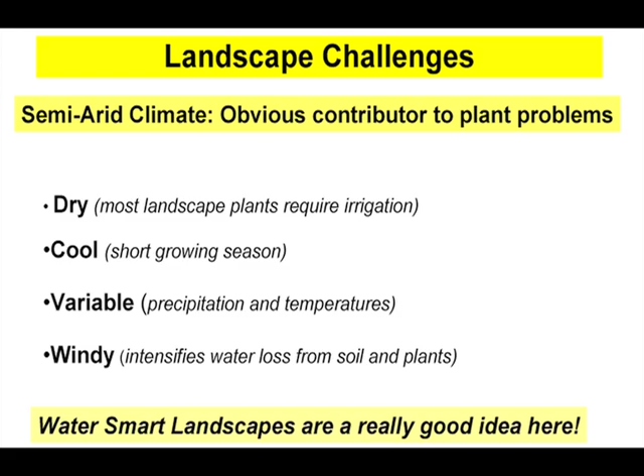And wind—it's a windy climate. It intensifies water loss from soils and plants. So water-smart landscapes are a really good idea here.

I think the climate is the most obvious contributor to soil or plant problems we have here. But perhaps what people don't necessarily appreciate is the most common inciting factor to plant disorders in Colorado is the condition of the soil. And yet that's the one resource we tend to know the least about.

Landscapers and gardeners can tell you at depth about every plant in their garden. They can probably even give you the name in Latin. They can tell you the diseases and the insects. But usually, not always, but usually they can tell you little if anything about what they're standing on.

But here's the thing, soil is the fundamental component of any landscape. Whether you're talking a xeriscape, your lawn, your veggie garden, your orchard, it is the fundamental component. Soil conditions contribute to over 80% of any and all plant problems you're ever going to see on your landscapes.

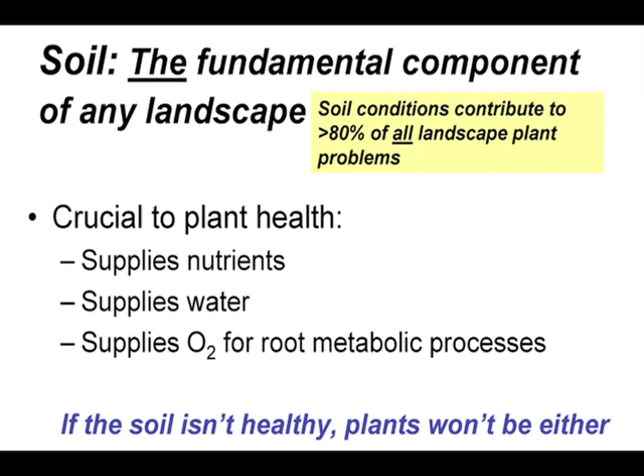And that's because it's so crucial to plant health. The soil is what provides the plants with nutrients, with water. Those two are fundamental for plant growth, but it also supplies oxygen because roots have metabolic processes that require oxygen.

Here's the thing, if your soil isn't healthy, your plants aren't going to be either. There's an old saying out there, if you feed and nurture the soil, the soil will then feed and nurture the plant. And I'm going to argue, how can you nurture the soil if you don't know anything about it? If you know the basic properties of your particular soil, you can use that knowledge, that information, to improve the soil health. Thereby, what you're doing is better managing, better nurturing your landscape and your plants.

And I argue that one of the best ways you can get an idea of your basic soil properties is, if you've never done it before, get a basic soil test. Know what your basic soil properties are.

Now, you have this FAQ sheet that talks about soil testing. I've got these if you want to do soil testing. What you get here is a soil container. There's a sticker in there to put your name and information on, but inside is all the information you need on how to sample, as well as the submission form. You fill all that out, send it in, get a sample, and get it analyzed. I think this is the best way to at least get a baseline knowledge of your particular soil properties.

What are those basic soil properties? I think these are the things you need to know if you want to manage your landscape well. It's important to know the texture of your soil. That's simply how much sand, silt, and clay are in your soil.

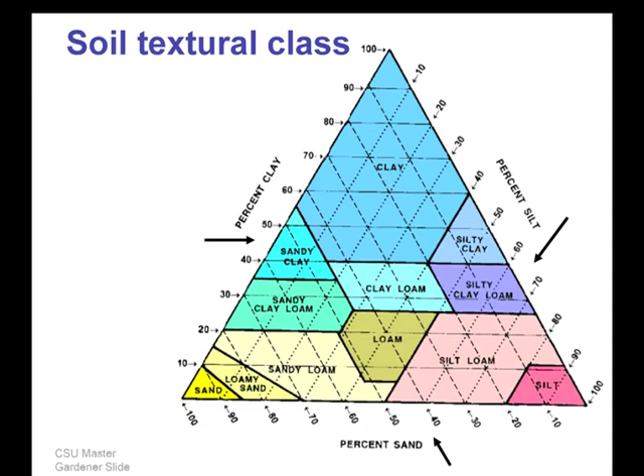Here's the thing: clay content strongly influences soil properties. You only need 20% clay for a soil to behave as a clayey soil. Take a look at the names—clay is showing up heavily in these names. Clay heavily dominates. Well, what does that mean? What are the properties of a clayey soil?

It's important to know your soil texture because soils dominated by clay are very different in properties than soils dominated by sand. And the intermediate soils have intermediate properties.

For example, soils that have a lot of clay in them have really high water and nutrient holding capacities. They can hold a lot of water, they can hold a lot of nutrients, and much of this is available for the plants, so that's a good deal for the plants.

The problem is clayey soils—if you have a lot of clay in your soil, you have a lot of small pores. Clay has small pores. Well, what that means is infiltration of water into your soil is very slow. Drainage of water through the soil is very slow.

So you end up with aeration problems. You end up with it being slow to warm up in the spring. They're prone to crusting, they're prone to compaction, and they're prone to salinity buildup because water does not move well through that soil.

Now, how many of you have clay soils? That's the norm. Any sandy soils? Am I the only one?

Yeah, you've got. I moved from Fort Collins to Windsor about 12 years ago, and I'm now in a sandy soil. It's a whole different world. I've had to relearn how to manage my landscape.

Sandy soils have low water and nutrient holding capacities. They just can't hold that much water or nutrients, so that stresses the plant. But they have huge pores, big pores, so they drain fast. That means they're not prone to aeration problems.

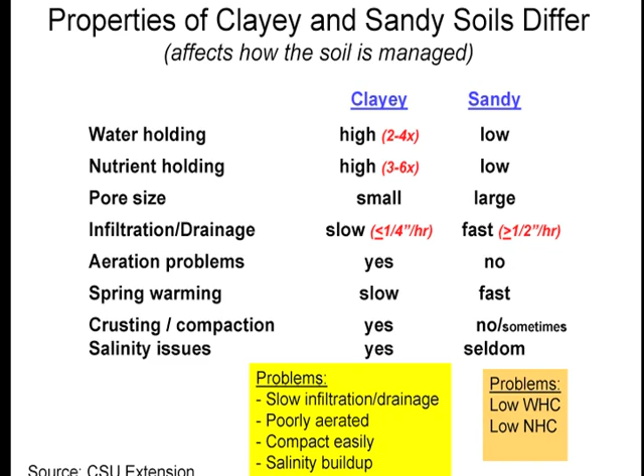They warm up fast in the spring. They don't tend to crust—crusting is a clay thing. Sometimes they're prone to compaction, but not nearly to the extent of a clay soil. And you don't usually see salinity buildup in a sandy soil because it drains so well.

So you do a soil test, it comes back, and the word clay shows up in your soil texture. That means what you need to be thinking about are these issues: my soil is going to have slow infiltration, slow drainage. That's going to impact how I irrigate.

Poorly aerated—that's a problem for your plants. You've got to be careful. You can compact the soil easily, and you need to watch out you don't build up the salt content of your soil.

For me, now that I'm in a sandy soil landscape, low water and nutrient holding capacity is my problem. These other problems are not any longer my major problems. My problem is how do I get this soil to hold enough water and nutrients to support my plants?

So if you have a clayey soil with all those small pores, you have lots of area to hold water, but you don't have enough big pores to aerate your soil. The opposite holds for sandy soils: plenty of aeration potential, but not enough small pores to hold the water.

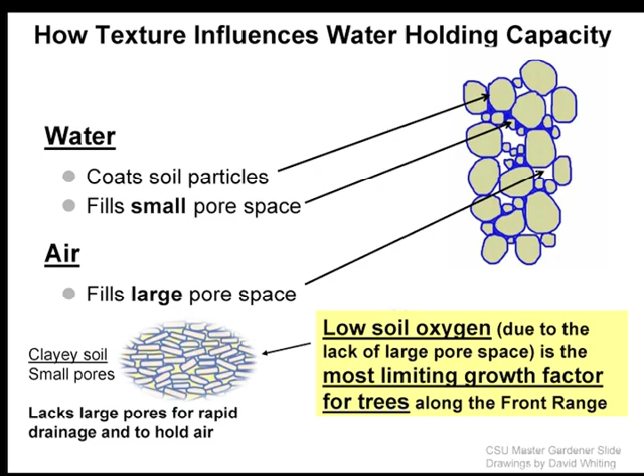You've also got to think about in your design and management: how fast can you add water into the soil? How fast will water go into your soil before it saturates the surface and runs off? How often should you add water to the soil? How deep will the water go? In this soil, if you irrigate too long, the water is going to be down below your root zone. So the general rule of thumb is on clay soils, water infrequently—you need to give that soil a chance to dry out and recharge the oxygen—and water thoroughly, get that water down deeply.

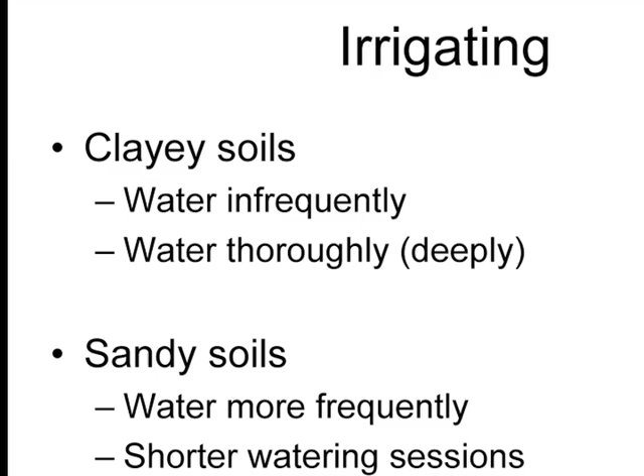Sandy soils, you're going to have to water more frequently. If you water every 5 days in the hot summer on a sandy soil, your plants are not going to have any water after about day 2. And water with shorter sessions—if you water 30 minutes, most of that water is wasted because it's gone down too far and the roots are up here while your water's down there.

So why is proper irrigation so important? Well, obviously you waste your water if it's running off. You've spent your money, wasted the water, and your plants are still thirsty.

Clay soils—I volunteered with the city of Fort Collins a couple summers ago and did irrigation audits. One of the things we found is people with these clay soils tend to water shallow, for a short period of time, and they like to water every day, very frequently. Well, that's just the opposite of what you need to be doing. They tend to do that because clay soils can't absorb water very fast, so runoff starts pretty quickly. Instead of learning that you can adapt to that, they just add water until it runs off, not much has gone in, and then they add it again tomorrow.

Here's the thing: what you do when you do that to a clay soil is you get a chronically wet surface soil. That acts as a barrier or a lid on oxygen from the air getting down into the soil and recharging it. So with time, the microbes down here are doing their thing, using up oxygen, and the soil becomes very low in oxygen. Well, the microbes shut down, and the roots won't go there—roots don't go into soil that's low in oxygen.

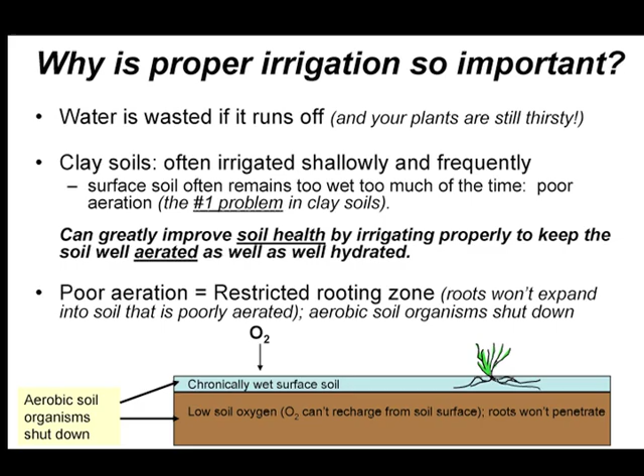Whether or not there's water in that soil, if it's low in oxygen, roots won't go there. So you're condemning this poor plant to be shallowly rooted in a chronically wet soil. It's not happy—it's not going to get nice deep rooting, like your lawn grass should have, until you can get oxygen down into that soil. This is unhealthy, not a happy soil. The plants and the microbes aren't too thrilled either.

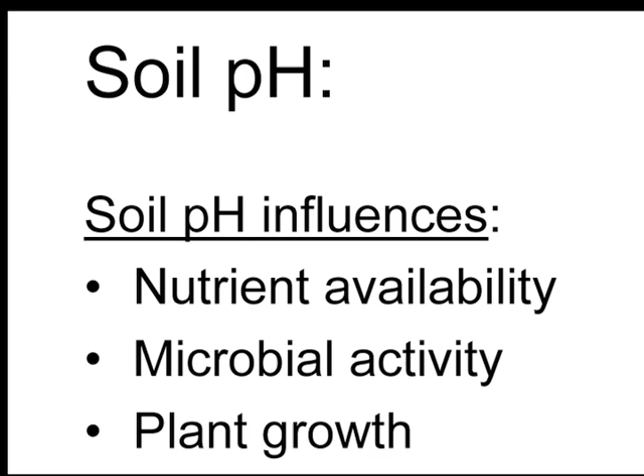All right, let's move off of texture. Why do you need to know the pH and lime content of your soil? Well, pH is important—it influences nutrient availability, it influences the type of plants you can grow, and it influences microbial activity. Different microorganisms live in different pH soils; the ratio of bacteria, fungi, and actinomycetes changes depending on the pH of your soil.

All right, this is your typical pH scale. If your soil is a pH of 7, it's neutral—equal amounts of acid and alkalinity. If the number's low, it's an acidic soil; if the number's high, it's an alkaline soil. Here is what's generally accepted as the range in pH that's acceptable—not ideal, but acceptable for most plants. Most plants will manage a pH of 6 to 7.5.

There's the exceptions, the acid lovers. Blueberries, rhododendrons, and azaleas want an acid soil. They're not going to be very happy over here, since they actually prefer very acid soils.

Some of our Colorado soils have a near neutral pH from 6.8 to 7.4. This is your mountain soils and old garden or lawn soils in Old Town, where 50, 60, 100 years of irrigating and adding amendments has made their pH a little bit lower. Here's the thing though, most front range soils are alkaline, pH 7 to 8.3, and many of our soils are outside of the sweet zone.

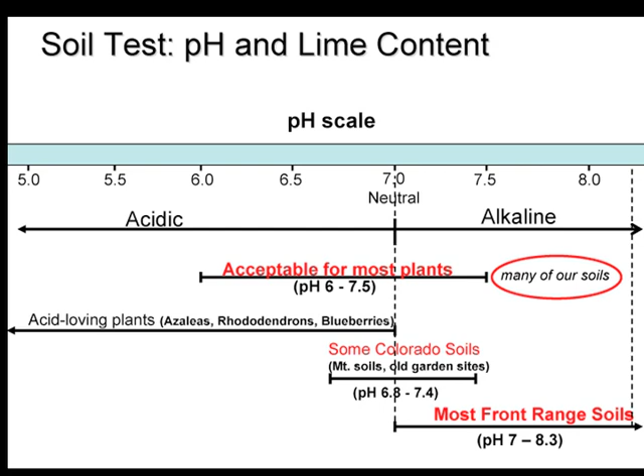They're highly alkaline, outside of this generally accepted range of pH that plants are happiest in. So we get this question a lot. I'm involved with the master gardeners and we hear this one all the time: how do I lower my pH? Sometimes it's just, I'm at 7.8 pH and want to get it down closer to neutral. Many times people are asking, I want to grow a blueberry, a rhododendron, an azalea. How do I take my 7.9 pH and get it down to 5?

You don't. So here's the rule of thumb: if your pH is alkaline but low, in the low 7s, you can lower the pH by adding an acidifier such as sulfur, only if there's no free lime in that soil. That's why you need to know your lime content.

But here's the deal, our soils are well buffered. What that means is the chemistry of soils is such that it resists a change in pH. It's hard to change the pH even if you don't have any lime. It takes a lot of work and the results are usually temporary.

So it seems like one of the things we're trying to stress is maybe change your mindset. We don't live in Ohio, we don't have naturally acid soils for the most part up and down the Front Range. So instead of trying to grow an azalea, take a look at alkaline-tolerant plants. There's a bunch of gorgeous ones, and I'm sure that will be talked about later today.

If you just have to grow that blueberry, you will not successfully change the pH of your soil enough to get it down to an acid level that blueberry is happy with. So instead, think about a big pot, making an artificial acid soil, and growing your blueberry in the pot.

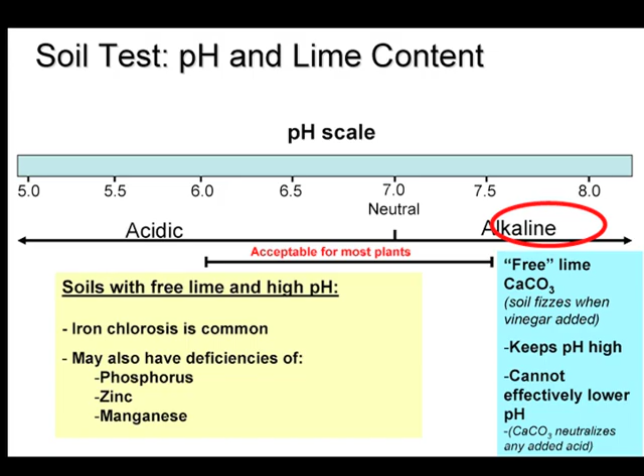Okay, here's the thing though. If you have a soil that's strongly alkaline and it contains free lime, all you need to do is drip a little vinegar on your soil. If it fizzes, you've got free lime. That's a predominant characteristic of our soils, and it tends to keep the pH high. If you have free lime, you cannot lower the pH of your soil effectively by adding acidifiers. That lime will neutralize any and all acidifier you can ever add to that soil.

So, you get your soil tested, it comes back and says you've got a pH of 7.9 and very high lime. Well, you just use this as a red flag for your soil, for your landscape. Soils with high pH and high free lime, here are some things that happen: iron chlorosis is common, and you may also see deficiencies of phosphorus, zinc, and manganese. It's not that there's not enough of these nutrients in the soil, our soils are loaded with iron and these nutrients.

The deal with many of these nutrients, and these are the main ones, is that as the pH of the soil gets higher, the plant-available form of that nutrient precipitates out. You've got lots of iron, but it's in a form at a high pH that the plant can't take up. The plant can't use the forms of these nutrients, much of it, at high pHs.

So, you've got your bad news: you've got 7.8 pH and a very high lime. You know that your soil is going to be susceptible to iron chlorosis. Well, you need to start thinking about, if you have the opportunity to put a plant in, what plants have a high susceptibility to iron chlorosis?

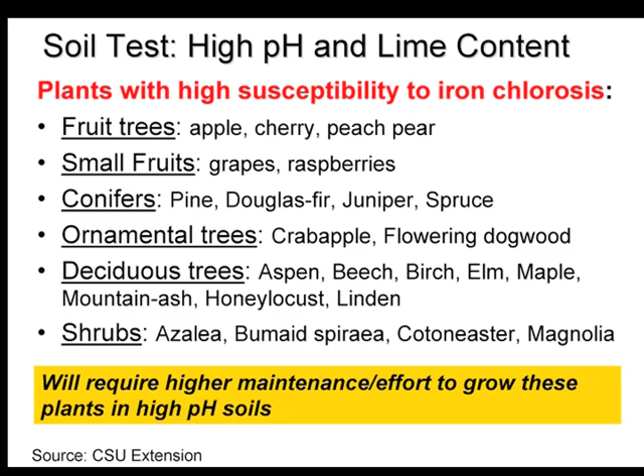Well, take a look at this: the fruit trees that are listed, the small fruits, the conifers, ornamental trees, deciduous trees, shrubs—everything on here is something that's very popular as a landscape plant. People want to grow these. Now, it doesn't mean you can't grow them, it means that growing them on this type of soil is going to take a lot more maintenance. You're probably not going to have the prize plant. It's not going to be the biggest, lushest, happiest, healthiest.

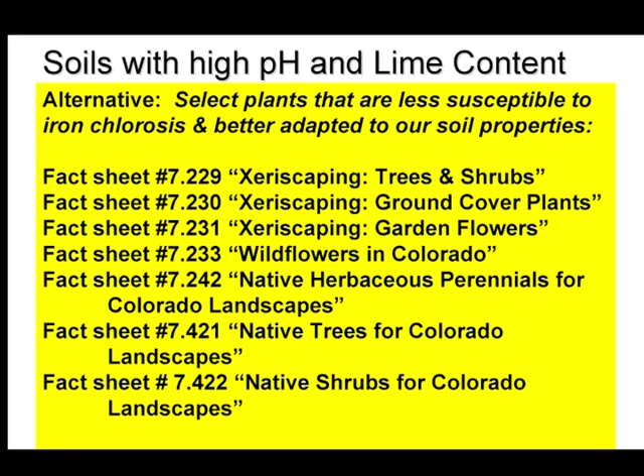It's going to be more susceptible to disease and it'll probably die young relative to the plant being in a place that it's happy. As an alternative, think about selecting plants that aren't so susceptible to iron chlorosis and are better adapted to our soils. Think about plants that are happy here, instead of trying to force plants to live on soil and in a climate where they're simply not well suited. There are tons of fact sheets on xeriscaping, wildflowers, and native plants—just a wealth of good information. All right, we're going to move on and talk about organic matter.

Organic matter in the soil has a small living component and a large non-living component. A healthy soil is a living, breathing ecosystem, chock full of all kinds of organisms. It's loaded with organisms ranging from microscopic fungi, bacteria, and actinomycetes, to bigger critters like worms, ants, spiders, and insects that you can see, to even bigger creatures living in the soil like pocket gophers, prairie dogs, mice, and ground squirrels.

Many of the soil organisms living in the soil have a direct influence on plant health. I'm going to focus on some positive influences—there are all kinds, but three really important ones. One is the decomposition of organic litter. All kinds of microorganisms and organisms are involved with that process. A plant dies, the roots are dead, the tops fall to the ground, a mouse dies—living creatures die and become litter that is then decomposed in the soil. All kinds of organisms are involved with this.

The benefit of breakdown of organic litter—while practically speaking we're not 200 feet deep in carcasses—is that when you break down that litter, the decomposition process releases nutrients available for plants. Plants can't take up nutrients in a dead leaf; they can only take up those nutrients after that dead leaf is decomposed or begins to decompose. The decomposition process also ultimately forms soil humus, and that's a good guy in your soil.

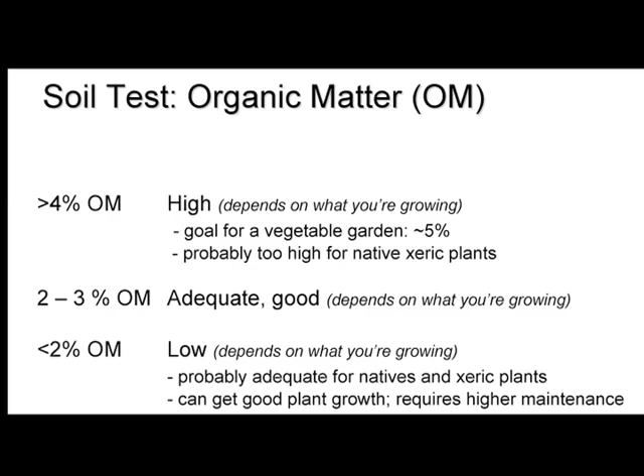If you're trying to grow a native or xeric system of plants in a high organic matter situation, you may end up with weeds and undesirables pushing out your desirables. 2 to 3% is considered adequate, good, but it depends on what you're growing. Less than 2% is generally considered low organic matter. It's native here. Our soils, the shortgrass steppe, are less than 1%. That's pretty common, but it depends on what you're growing. The natives and xerics are probably just fine with this.

Now, if you have low organic matter and you've decided you're not going to add more for whatever reason, it doesn't mean you can't grow plants. It just means it's going to be higher maintenance. The goal is to match the organic matter needs of the plants with the organic matter content of your soil, and to stay in a reasonable range—to not try to grow a plant that wants to be in a bog, for example, or a plant that loves high organic matter in a 1% organic matter soil. You need to know what your plant prefers, how far you can change your soil organic matter, and then match them up.

Why add organic matter? It improves aeration and drainage in clay soils. It increases water and nutrient holding capacity in sandy soils. You'll get some plant available nutrients, stabilize your pH, improve structure and tilth—the workability of your soil—and it feeds the microbes. Now there are some differences in...

What am I talking about with organic amendments? Organic amendments are not the same thing as organic fertilizers. Organic amendments are things like compost, biosolids, sphagnum peat, worm castings. When somebody says add organic matter to your soil, they're usually talking about this.

Organic fertilizers are organic materials too, they just have a high concentration of nutrients. So this is stuff like the meals—plant meals, alfalfa, soybean, cottonseed, corn gluten meals, animal meals, bone, blood, feather, guanos, fish meal, seaweed, rock powders. These are mainly organic fertilizers, though the rock powders are not. They're materials with a concentration of nutrient.

There's a major difference between these two materials. Organic amendments are not regulated by law, and this is really important to know. No regs, no standards for bag products, some voluntary standards for bulk. They don't have to give you any analysis. They don't have to tell you what's in the bag other than this is steer manure, it's composted, it's pulverized, no weed seed, it doesn't smell. That is not nearly enough information to know what you're putting on the soil.

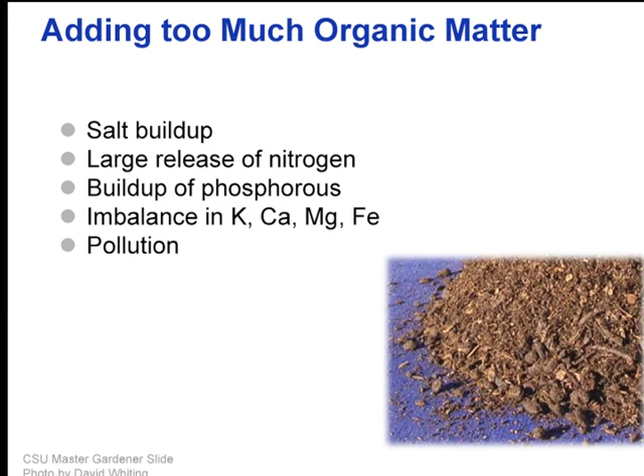You can get a big buildup of phosphorus. That's becoming a problem in the country. My understanding is, and I don't know how accurate this is, but there are states seriously considering not allowing phosphorus fertilizers to be applied to landscapes.

When you overload organic matter, you can also end up with an imbalance of the nutrients in the soil. Soil nutrients are healthiest at specific ratios of potassium to calcium to magnesium. If you dump a whole bunch of potassium into the soil, for example, and many animal-based products are loaded with potassium because of what the animals eat, you mess with the plant's ability to take up calcium and magnesium.

Even if there's a whole bunch of calcium and magnesium in the soil, and our soils are loaded with available calcium and magnesium, if you overload with potassium, you mess up the plant's ability to take up something else, in this case calcium and magnesium. When you've got a whole bunch of nutrient that the plant doesn't need and will never need, that the microbes don't need, you're setting yourself up for being a source of pollution.

Okay, we're going to move to salinity. Let's talk about salinity. I mentioned it a little bit. So what happens if you've got too much salt in your soil? What does that do? Why does that matter?

Well, the biggie is it reduces water uptake by plants. They actually dehydrate. Even if there's a lot of water in the soil, water starts moving from the plant out into the soil. It's an osmotic potential thing. When there's too much salt in the soil, the plant cannot pull up water, even if there's plenty of water to be had. It will burn the roots, restrict root growth, burn the margins of the leaves, inhibit flowering, mess with seed germination, and reduce your fruit and veggie yields.

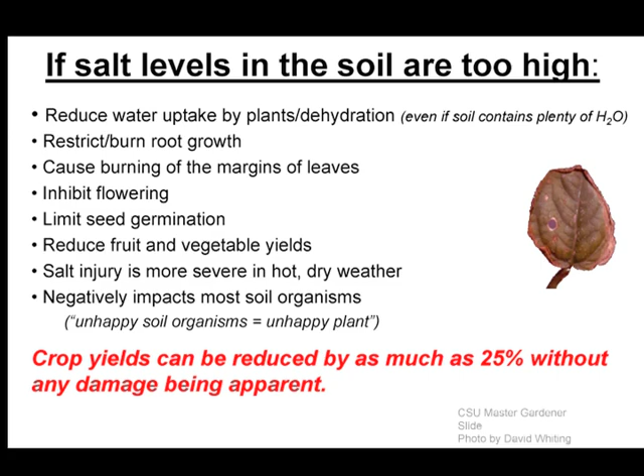Here's the thing too, people don't think about. When your soil's too salty, that's a negative impact on most soil organisms. Just imagine a worm trying to live in a soil that's just had a boatload of something salty dumped onto it. You know, it's true. If your organisms aren't happy, your plants aren't going to be happy.

And here's an interesting thing I hadn't realized until recently. With your fruits or your veggies, you can have as much as a 25% reduction in yield and not see a single indicator that your soil's too salty. Doesn't show up at all.

You don't have any white crust on the soil, there's no burning of the leaves, but a 25% reduction. Salt is a serious issue for plants.

So how much is too much? Well, if you have your soil analyzed, the lab talks about soil salinity in terms of electrical conductivity, or EC. There are two kinds of units, millimhos per centimeter or decisiemens per meter. The units don't matter, they're interchangeable. What you're looking for is the number 2.

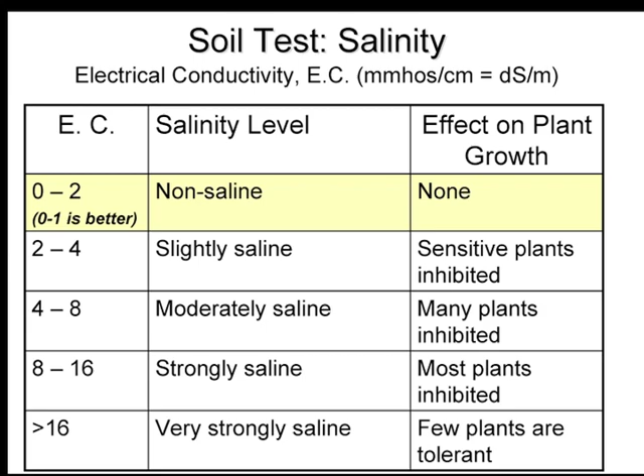If the EC of your soil is less than 2, that soil is defined as non-saline and you shouldn't have a negative impact on the growth of plants. If that number is higher than 2, the higher it is, the more saline your soil is, and the more plants are killed or severely restricted by that salt load. So this is a good number to know.

Here's the thing, most of our soils are not naturally saline, but by how we manage them, by what we add, we're building up the salinity of many soils. Because soil amendments such as manures and biosolids and compost made from them are very high in salt.

So are many of these topsoils that you can buy. They're not regulated by law either. You can buy a stellar product, it's great topsoil, or you can buy basement diggings with a bunch of raw manure mixed in and sold as topsoil.

If you don't know the analysis of this soil, what we're finding at the soil test lab is over and over again, people bought a topsoil, or a potting mix, or a soil mix, built a raised bed, and everything died. They tried to grow a veggie garden, and everything died.

The director of the soil test lab talked about serving as an expert witness at a big lawsuit in Denver a number of years ago. This guy built a palace of a house, spent $100,000 on his landscape, and the landscaper neglected to have any analysis done on the yards and yards of topsoil he bought, and everything died. He was getting sued.

Well, the salinity of the topsoil he bought was something like 12, hugely high, and we're seeing numbers like that over and over again. These products are not regulated by law. Some of them are excellent, some of them are not. So be careful what you add to the soil if you don't know its analysis. Use them sparingly, and monitor the salt levels.

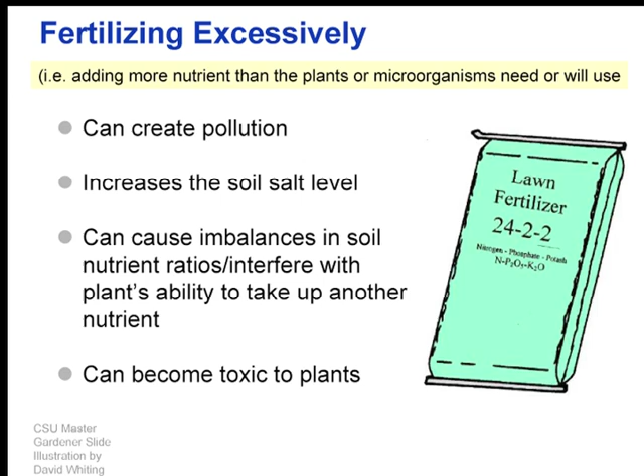You'll salt up your soil, mess with the balances of nutrients, and with the micronutrients you can add so much that you're actually at a level that's toxic to plants. We're finding that with some of the products people are adding, a topsoil or a potting mix, sometimes they're extremely high in micronutrients, so high that it's toxic to the plant.

Okay, evaluation of your soil. Any particular questions you have on how to soil sample, how often to sample, or how many samples are fairly well covered here, and I'll be around to answer particular questions.

Again, with the sample kits, these are nice. The lab likes you using these because people tend to give you a gallon of soil for the analysis, or a 5-gallon bucket of soil, and that's a huge labor input for the lab to process all of that to representatively subsample. This is all you need for a routine soil test. So that's one of the reasons they like you to use these.

The others are Ziploc bags, puncture, open, they're harder to store in the lab, it's just a practical thing. All the instructions you need, everything you need is in here. These are free. You just pay for the soil analysis when you send in the sample, or they'll even bill you.

Just so you know, right now the routine soil test is $28. If you have like a potting soil, something you know is higher in organic matter, a potting mix or a manure or a compost, that's more expensive because you have to do more analyses, and then there's all kinds of specialty tests you can do if you want.

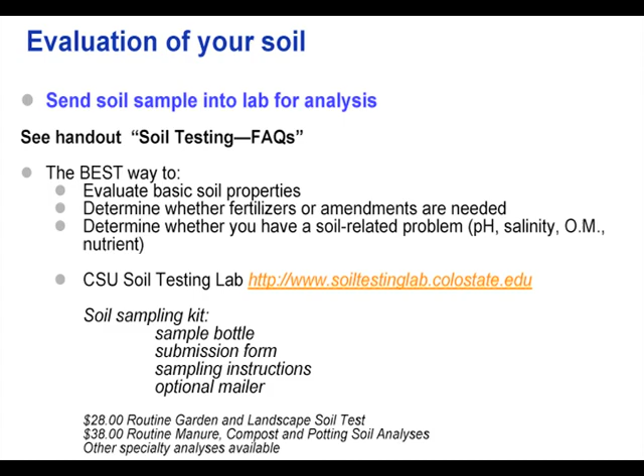Okay, I'm a 30-year soil scientist. My bias is numbers on soil, that's what I do, so obviously I think this is very important. But if you know your basic numbers, you really can use this as a tool. Knowledge of the basic properties of your soil to a large degree determines how you ought to be managing that landscape. It's an important tool in your toolkit, but it's not the magic bullet.

I want to make a final point here. Soil testing isn't going to provide all the answers to your landscape problems. If your problem is you're a terrible irrigator, you overwater consistently, you underwater, or you're inconsistent, soil tests won't tell you that. It's not going to tell you if the main problem on your landscape is disease or insect damage or weeds or too much shade.

You start out with this lovely bluegrass lawn with your new house, and in 15 years your trees are enormous, shading that bluegrass, and the bluegrass is looking kind of ratty. Bluegrass doesn't like shade. So you need to know, the soil test isn't going to tell you that that's the main problem with that bluegrass.

It's not going to tell you if really the variety you have of, say, your crabapple isn't a very good variety—there's other varieties that are better. Soil test isn't going to say whether or not your main problem is you're neglectful of your landscape. And it's not going to tell you whether or not your soil is compacted.

Compaction is a number one issue with our soils on landscapes because it gets so compact when we build the buildings, and we've got so many clay soils. With compaction, you get poor aeration and drainage, and that may be the number one problem on your landscape, not a specific soil property.

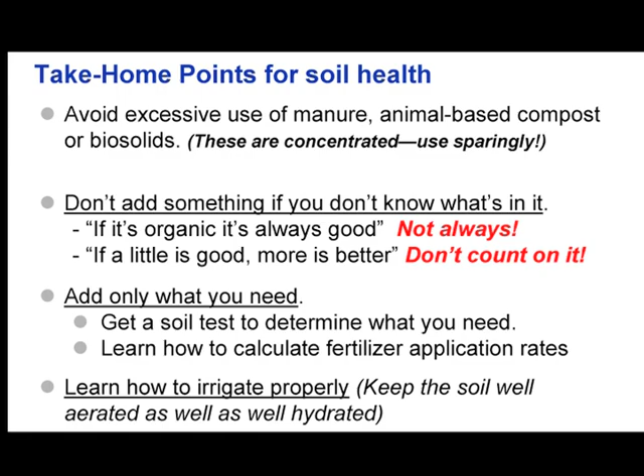Bottom line too, last but not least, is learn how to irrigate properly for your particular soil, for your particular landscape. If we focus on not only hydrating the soil but keeping it well aerated, you're going to have a lot happier, healthier soil. Now I think, yeah, that's it. And if we have a few minutes I'll answer questions. Otherwise, let me get into landscape design, water-wise landscape.

This is one of my passions. It is really a fun topic to work with because there are no black and whites. It's all grays because there are so many factors that play into it. When we talk about plants and their water use and the soils and all the things that play into it, it is a very, very complex topic, and it's one that I love to play with and teach about.

If you want the long version of this presentation, the 6-hour version, you can go to my website, which is www.cmg.colostate.edu. Click on Garden Notes, and Garden Notes 411, 412, 413 is the 30-page handout that I'm just pulling a few highlights from for today's class.

I try to look at that longer class and say, if I only have 45 minutes, what do I really want to say? First off, design, landscape design is not the same discipline as gardening. People who are excellent gardeners may know nothing about design, and people who are excellent in design may know nothing about gardening. There are those who have expertise in both areas, but they are separate disciplines. So being a good gardener does not mean that you know principles of design.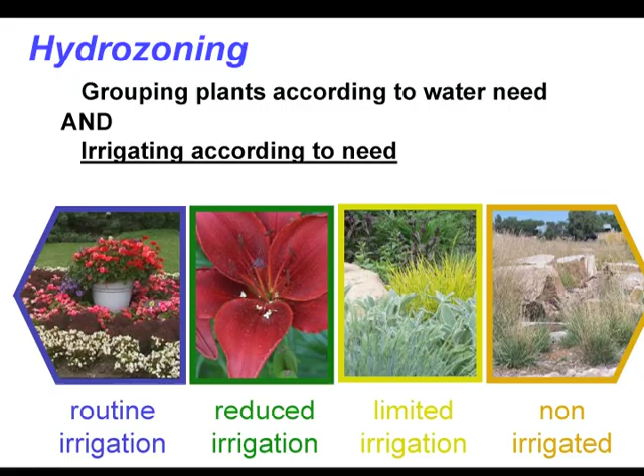And where does the typical Colorado landscape come out? Most landscapes, the entire design is routine irrigation. We have a habit of thinking high input Kentucky bluegrass covers everything that doesn't have a flower or shrub here and there. Hydrozoning is walking the talk, recognizing that we have a lot of options.

And it goes back to the design, back to what do I need to achieve in this landscape. So I may have lawn areas that have routine irrigation—that would be the football field, the soccer field, the baseball field that has a lot of traffic on it. It would be unlikely that a home landscape needs routine irrigation on the lawn because you don't have the wear and tear. Reduced irrigation for a lawn is going to irrigate at about 80% ET. It will look just as nice as 100% ET, but it won't take as much wear and tear.

The only wear and tear that my lawn gets is me mowing it, unless I have a party. So it doesn't get a lot of wear and tear.

Minimal irrigation lawns. Some examples of companies here in Fort Collins that are phenomenal at understanding this are Hewlett-Packard on Harmony Road, and Anheuser-Busch Brewery. In their high-use areas, up by the office buildings, at what Anheuser-Busch calls the Visitor Center where you go see the Clydesdales, you're going to have as perfect a bluegrass lawn as you could possibly grow in Fort Collins, because it is a high-use area.

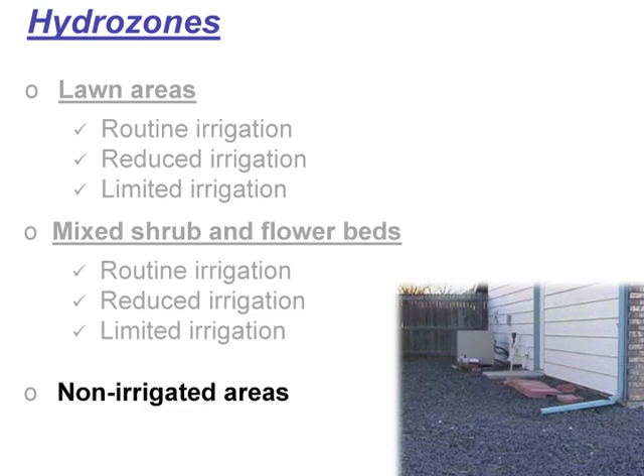Non-irrigated areas - if there is no landscape function there, why are we watering it? I think a great example is the sides of a home. If there's no landscape use for that space, other than it being space between you and the neighbor's house, why are we irrigating it? It's walking the talk.

A few quick slides to look at how this may apply. I'm going to do a home scenario because it levels the playing field. The blue would indicate routine irrigation, the green reduced irrigation, then limited and non. Maybe I have a reduced irrigated lawn, because a home lawn rarely would justify high input.

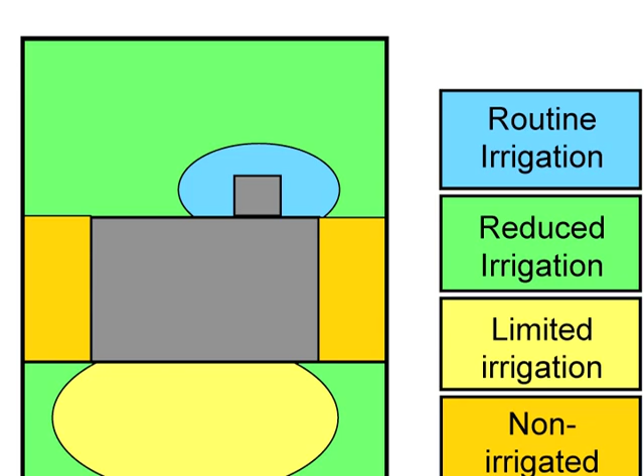Maybe I have some flowers here that require routine irrigation. Maybe I have a section here on limited irrigation, plant materials that do fine only being watered during dry spells. So that would be an example of hydrozoning.

Now, I don't mean that the bed is necessarily that exact shape - that's simply how, in the design process, we identify that hydrozone. Maybe we go to a larger spot with limited irrigation. Maybe we have a section with reduced irrigation, and some sections with routine irrigation.

Again, what we're saying is different sections of the yard have different amounts of water that they will receive. Maybe the property is non-irrigated, with some limited irrigation in the high-use areas.

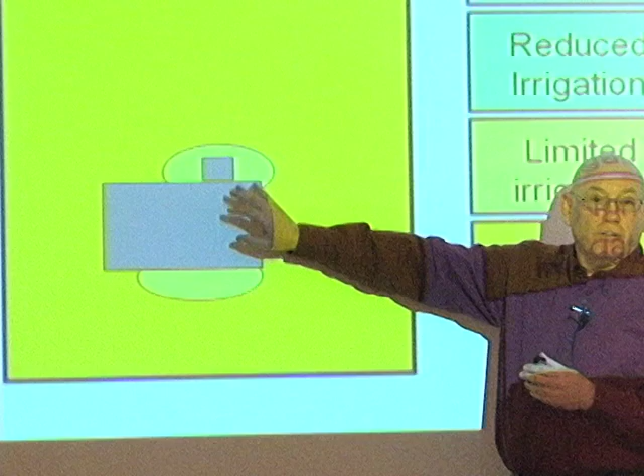The point we're making: if we want to walk the talk of being water-wise, the entire landscape is not watered every Wednesday and Saturday just because it's our turn. It is watered based on the plant materials that are there and the use of the property.

So here would be some other examples. Maybe I have a patio, a lawn, vegetable garden, flower beds. But maybe that flower bed doesn't adequately define zones. Maybe I have flower beds with routine irrigation in one section, reduced irrigation in another, and limited irrigation in a third.

And why can't I mix them? Because if I mix them, everything gets watered like the first, and I don't save water. And those plants that are truly xeric, that don't like heavy water, probably won't do well in that heavy water situation. So here's another scenario.

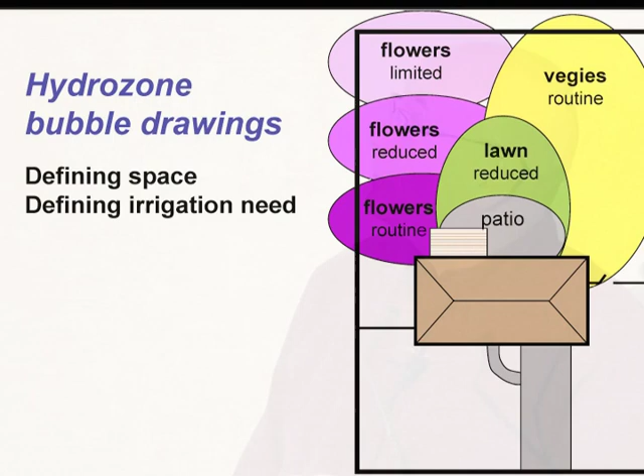The flower beds may be more clearly defined as various zones. Why don't I mix them? I'm on drip - why don't I put a dripper with 1 gallon over here, a half gallon over here, and 2 gallons over there?

Because that's not truly reflecting the plant's needs. The half-gallon dripper is going to wet a spot this big, the 1-gallon dripper wets a spot this big, and the 2-gallon dripper wets a spot this big. Does that mean the xeric plant has a small root system and the water-loving plant has a big root system?

That's not accurate. So I have different zones that I can water to different amounts. That is hydrozoning. That is walking the talk.

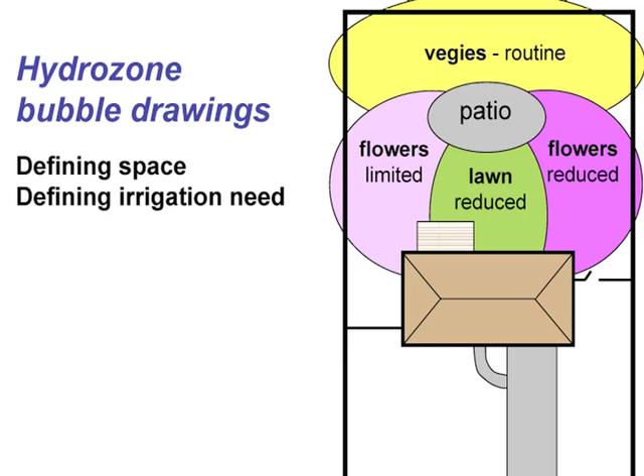Okay, different scenarios. Quickly talking about creating practical turf areas. Again, water-wise landscaping is not anti-turf. It's about matching the turf to the use of the property. Like I mentioned with Hewlett-Packard, high input turf in the people area, low input turf on the rest of the property.

Quick comparison of the water use of Kentucky bluegrass and other popular turf options. If I look at Kentucky bluegrass, we're going to call it ET. ET is an actual measurement of the amount of water that bluegrass needs. In our climate, it needs 36 inches of rain and irrigation per season.

And where's the typical home lawn being watered at? About 60. So that would be the high input turf that will take all the best wear and tear. I could go to more drought-tolerant cultivars and reduce my ET to about 75%. I could cut to about 80% ET, giving 28 inches versus 36, or in reality, 28 inches versus the average of 60. And I couldn't tell the difference between this lawn and the 60-inch one, other than my lawn won't take as much wear and tear.

Do you have a lot of wear and tear? I could go to tall fescue, which is often touted as drought tolerant because it has a deeper root system, but actual water use is very similar to bluegrass. So it's a misnomer that it's a water saver.

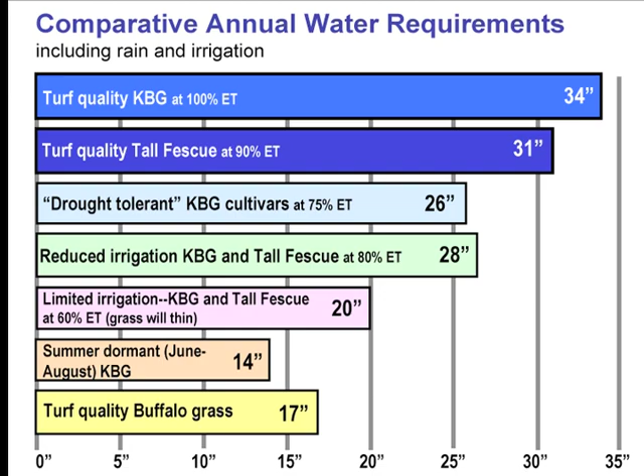What's the use of the property? How about buffalo grass? If you're going to have it green in the summer, it's got to have 17 inches. These are the three most commonly used turf types in Colorado. There's a lot of options beyond the high input Kentucky bluegrass that we typically give 34 inches to.

Again, water-wise landscaping is not anti-turf. This is a corporate property—this is where the bosses sit to think, and it is amazing what they come up with. They consider this one of the most valuable pieces of property on their entire campus, because the concepts that saved millions of dollars came around that table. Turf creates a people space.

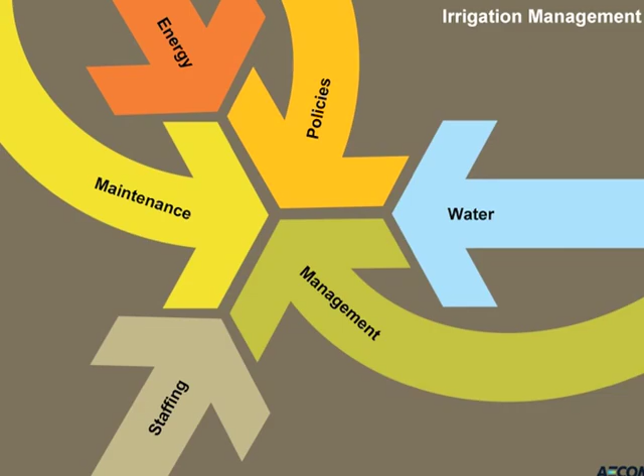When we talk about irrigation systems and managing water, there's a lot of things involved in that process, a lot of inputs that come into managing a landscape. We have management and maintenance policies that sometimes in public entities, parks departments and so forth, are policy-driven agendas. There's energy involved, there's staffing for maintenance and management, and then there's water that all comes together to make these systems work.

So the goals and challenges often are to meet the needs of a landscape or the needs of the community or user group, whatever it may be, whether it's a park or a corporate facility. David showed some really nice properties and talked about what the user wanted out of those. So this is what it comes down to: are we developing or maintaining parks, trails, open space, recreational areas, or is it our front yard?

We often, as public agencies, want to demonstrate the wise use of resources. As businesses and public agencies, we want to save water, use staff efficiently, save energy, and be overall efficient in what we do. And then we all have available budgets, whether we're a city or a homeowner, that kind of drive what we do.

So the benefits of smart water management are many. We heard a lot of them in terms of landscape health of plants, health of soils, and also reducing overall costs. In order to do these things and work within available budgets and resources, we need to have an idea how much water we're using and reduce the overall cost due to water usage.

So when we talk about water-wise management of irrigation systems, it really comes down to the efficient delivery of water to plant material in correct amounts and at the right time, to promote the optimal health of the plant materials.

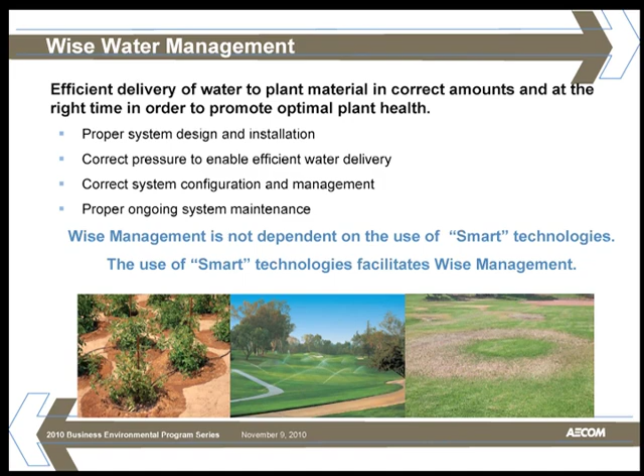So proper configuration of the system, proper management of the control systems and of the overall system, and then proper maintenance, because once a system falls into disrepair, you have problems with coverage.

When we talk about smart, we're going to talk about some smart technologies and what those are. Wise management isn't dependent on the use of smart technologies; they're really just a tool. The smart technologies facilitate wise management. So we need to be careful of some sales pitches that say put in this controller, an ET controller or whatever, and it's going to solve your problems. Well, it won't, if you have an inefficient system and configure it poorly.

Tony talked about Xeriscape, and I won't dwell on these things, but I hear people often talk about this, and it really drives me crazy - they say Xeriscape, I'm going to do a Xeriscape and just put rock in my yard. Well, okay, that's a Xeriscape, can't argue with that. But I think David talked very well about what Xeriscape is and how it works into the landscape.

So there are many parts to an irrigation system, and they're all kind of important, and all these things need to work together. And they're not only just parts, but also the process it takes to bring all those parts together correctly to meet the needs of the landscape.

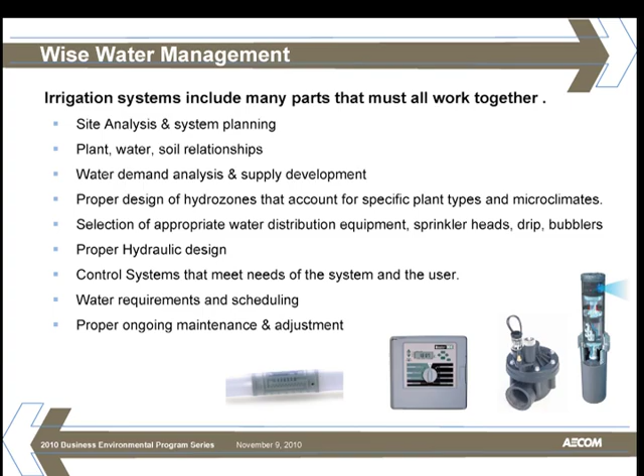So the number one thing is to look at the site, analyze the site, whether it's an existing site or a new design, and what are the needs of that site, how is it going to be used, and plan out the system so it can address the specific needs of the plants.

We need to look at the plant, water and soil relationships. As Dr. Reeder mentioned, the soil test is probably one of the most important things, not just for the plant, not just for the soil itself, but when it comes to irrigation design, understanding what those soil types are is very critical. So another thing we do is often look at what the water demand is going to be.

We've got to get water somehow, and so with larger projects that we work on, often a critical part of that up front is to figure out how much water this landscape is going to require. So we have some pretty good methods of calculating that based on the plant material that's going to be used, so we can properly develop a water supply.

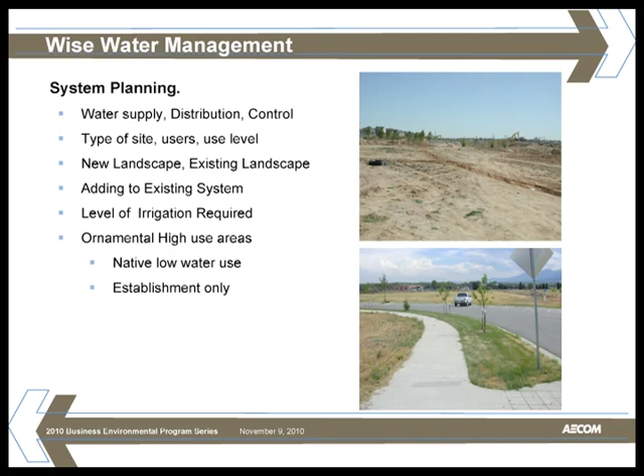And that might mean just getting the right tap size, getting the right pipe size, and understanding what the limitations of that water supply are.

Often, in the example of many commercial properties or homes, we have a determined supply available. So then we have to design a system that will operate within the limitations of that available water flow rate and pressure. And on bigger projects, sometimes we have the luxury of saying, okay, we need this much water, let's design a pumping station or a pond or a well or whatever that may be to meet those needs.

Another important thing, when you talk about salinity, is if you're using water sources other than the city water supply, what's the salinity level in that water? A big thing nowadays is to use treated effluent water, treated sewage water. A lot of cities are starting to use this, what they call reclaimed water, for irrigation of park spaces and so forth, and some cities are even making it available to residents. So it's important to realize that water can often have the potential of high salinity levels that we need to understand.

So proper design of hydrozones - I think David really addressed that very well. Hydrozones take a look at the specific plant types, and not only the plant type, but is it in a sunny area or a shady area? Is it on a slope? Is it in an area that's susceptible to a lot of wind or reflected heat or whatever that might be, so that we can tailor the system to meet the specific needs of the plants.

So then comes the selection of the proper equipment, which means things like sprinkler heads, spray heads, rotor heads - rotator heads are kind of the new thing now. And these all have their specific place where they are appropriate.

And also that includes drip irrigation and bubblers or whatever it might be to meet the needs of the plants. And then proper design of the system means that we have proper hydraulics so that we get proper pressure to the system, and control systems that meet the needs of the user and of the landscape.

We get involved in a lot of large projects where the user comes in and says, we've got to be highly efficient, we want an ET-based system or a central control system. And we design that into the system so that they have all this capability, but often they don't have anybody that's going to manage that. They don't have the ability to really make use of that system.

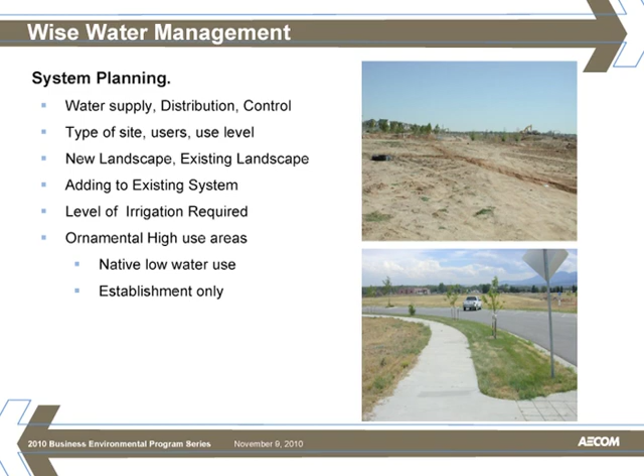How much irrigation is required is driven by the use areas and the plants. We have different use areas - is it a high use area, turf for example, that needs more water than a low use area, and then establishment only.

A big thing now is to use native plant materials, native grasses. A lot of big park sites, instead of doing bluegrass everywhere, will design with bluegrass in the sports field and the areas surrounding it. Beyond those real use areas, they want to use more native grasses that often don't need much irrigation, and over the long term maybe don't need any. But it's often important to get those established - if they don't get properly established, weeds come in and choke them out, and the owners aren't happy with them.

It might take several years for those to finally grow in, and that process can often be sped up if we have some establishment irrigation to help get them going. So that's something to figure in as well.

Some sites get very complex. They might have interior spaces, water features kind of mingled with them, and so there's a lot of planning involved in more complex type projects.

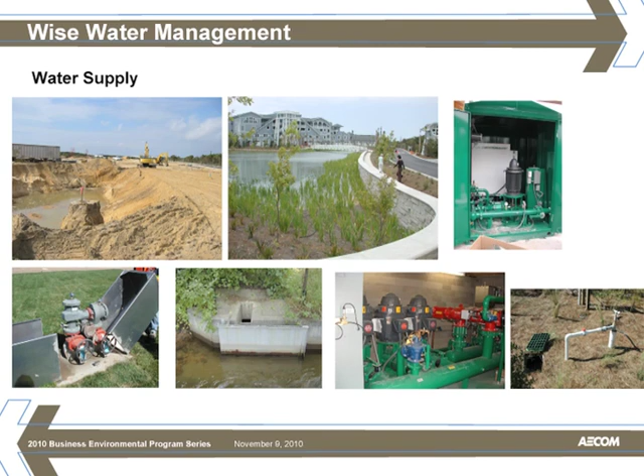Water supply - we get involved in developing all types of water supplies for the landscape, from well systems that feed into ponds that we then pump out of, raw water delivery through a ditch, or even just a municipal type water supply connection.

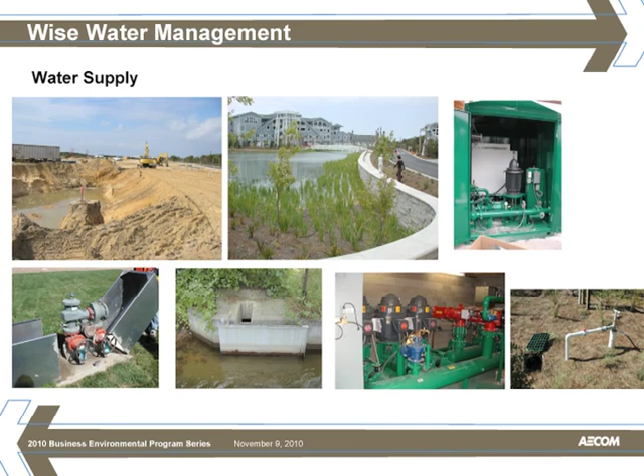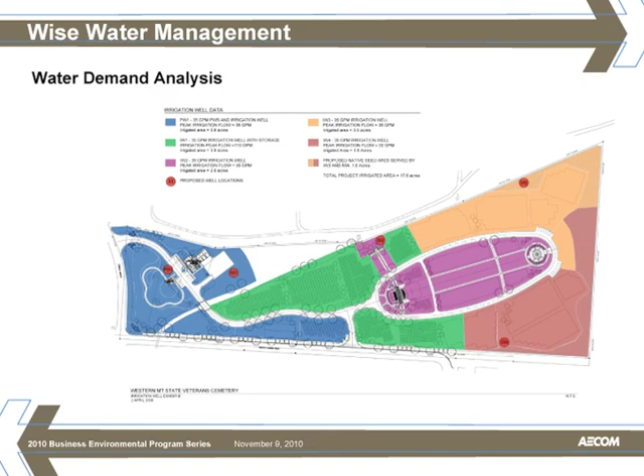The water demand analysis will often look at the site and look at the different use areas. This is kind of simplistic, it doesn't break it down as much as we often do. This is just an analysis that was done for a veterans cemetery we worked on, looking at the water demand needs in different parts of the site, because of water laws to do with how much water they could use out of each well. So we can calculate what these amounts of water would be.

When we talk about hydrozones and system zoning, we need to look at what kind of plants they are, where they're located, what's the spacing and density, what special maintenance issues there are, what kind of exposure it has. This is really the key to having a system that can operate efficiently. It doesn't guarantee it's going to operate efficiently, but if you design a system that addresses the different hydrozones, and it's configured and managed properly, it can then operate very efficiently.

But I want to stress, if it's not, then you really didn't accomplish anything. So it's really very critical that when a lot of work goes into designing a system and making it all work, that it's then managed correctly.

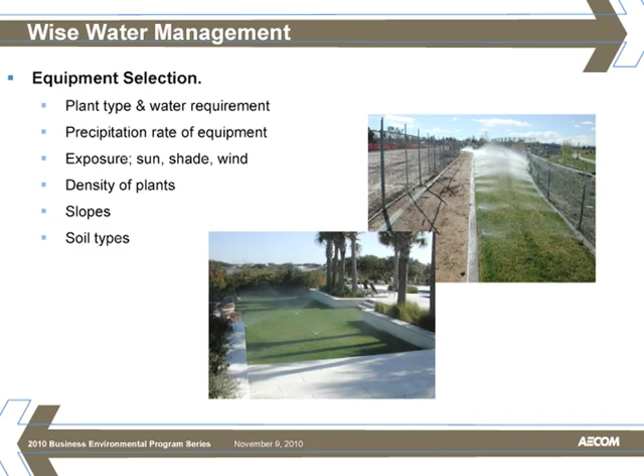So the selection of equipment - when we talk about equipment selection and meeting the needs of the plants and the soils, often we talk about precip rates. Precipitation rate means how fast water is being applied to the landscape. If it's applied too quickly, say on a high clay soil with a slope on it, it's often going to run off, so that needs to be applied at a slower rate so it can infiltrate.

If it's a sandy area, it might need more frequent irrigation and it might not have as much tendency to run off. Density of plant material can make a difference on how much water is required, as can exposures. So really just the appropriate equipment for the type of plant and the area is what we want to get from this.

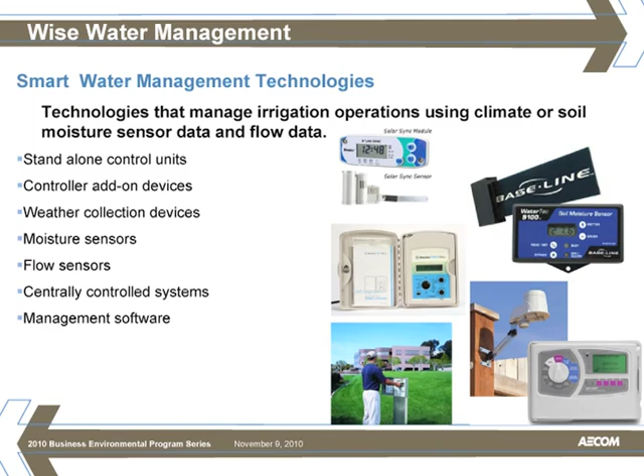Let's talk a little bit about smart technologies. On the tables back here, there's several of these type of smart controllers on display, and they vary - there's different methodologies of smart controllers, the main one probably being ET-based type products. There's also ones that measure soil moisture levels. These are available as a standalone controller that you replace the whole controller, or as add-on devices you can add to an existing controller to give it some additional smarts. I think these are to meet the varying budgets of different users.

There's different weather collection devices. There's ET gauges, one back here that just measures the various hydrologic data needed to develop the evapotranspiration rate number. David talked about ET as a measurement of how much water is required. That stands for evapotranspiration, and there's a formula to calculate that number based on various factors such as temperature, relative humidity, solar radiation. So by measuring the weather data, we can then calculate that. Some of these devices do it in different ways. You can use a full-blown weather station or some simpler devices that are quite effective but not as costly.

So we talk about moisture sensing. Really what we're trying to do is maintain a moisture level in the soil. Using the ET-based devices, you're estimating how much water you're going to need to put on to replace what's lost, so that you can maintain a certain moisture level. When you use the soil moisture sensors, you're actually looking at what the actual level of moisture is.

There's been varied success with different devices. I think there's now systems and sensors available that are very reliable and work very well. But it's critical that they're implemented correctly, installed correctly, in the correct locations and so forth in order for them to work. And then also that the control systems are programmed appropriately to take advantage of those.

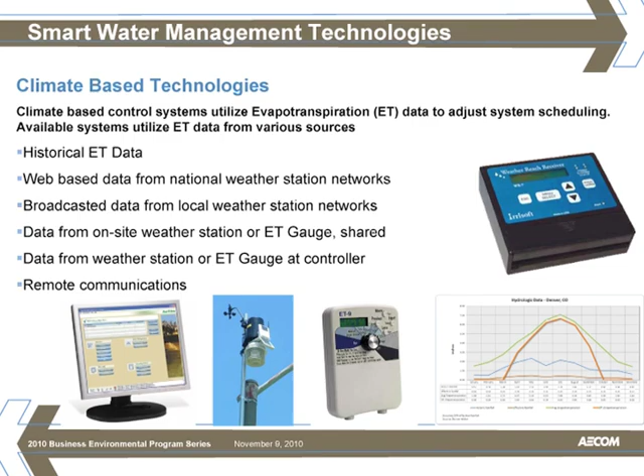This is a graph showing the months of the year, and the evapotranspiration. The water requirements go up in the summer, and then they dip back down. You can see that the actual water requirements vary almost daily. This is just looking at historical data, but if you look at actual data, we get a line that goes up and down all the way. So the average of that might be somewhat lower than this. The difference between just using historical data versus using real-time data can even further reduce the amount of water that could be saved.

Then the soil moisture technologies - there's different types, the water on demand and the suspended cycle. This TDT technology is some of the technology that's very successful.

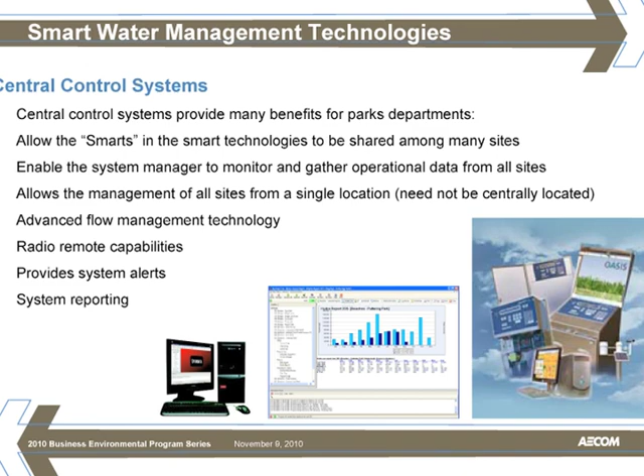System reporting is important because you can get reports on daily, monthly, annual water use. All kinds of reports are available with these systems to help the person managing the system understand how they're doing and how much water they're using or saving.

So there's a myriad of communications options nowadays. Most all of these systems can utilize any combination of these type of communication options.

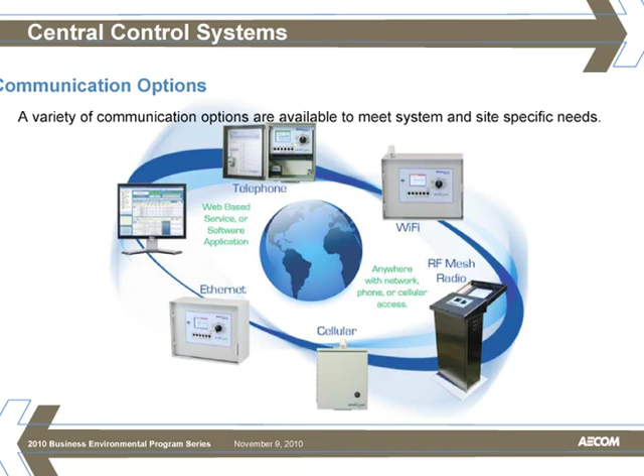Again, just managing large sites - I think we kind of talked about this one. When you talk about these systems, it's very critical that they're planned out, and that they're not just thrown in and implemented haphazardly. There's a lot of planning that needs to go into these to make sure you have a system that really the user can utilize, and a system that functionally has the features that a specific user might need.

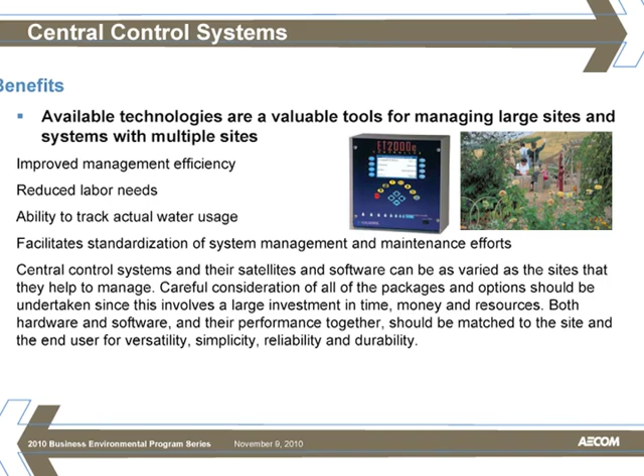It's important to look at what control systems are available, identify the goals and priorities of whoever's going to be managing or running the system, and identify the technologies that are available. Often these things need to be implemented in phases, so looking at a phasing strategy that allows them to use available budget and apply it in a logical fashion. Often we want to start implementing these things in areas where you can realize the biggest savings first, because it is a large investment.

I'm not going to get too much into all this planning, but we often go through a system inventory. This is where we had all the parks data in a GIS database, and we could look at this and say, okay, the existing park system uses all these types of controllers, and here's where they're at. It's a great tool for figuring out how to start implementing the system and how many controllers there are to replace, and if you have communications in a given area, it really helps in developing a communication network to ultimately serve all these controllers if they were converted to a central control system.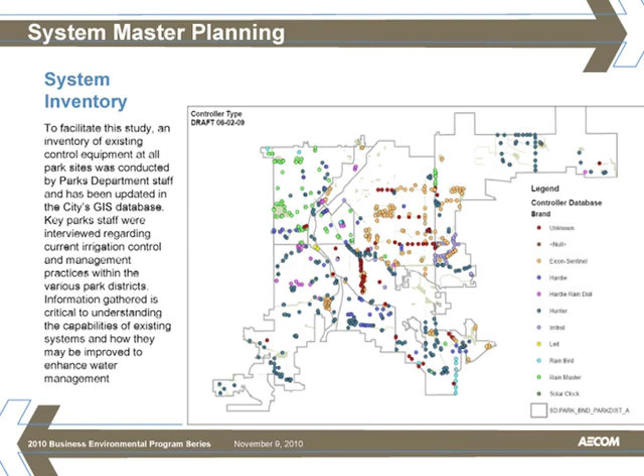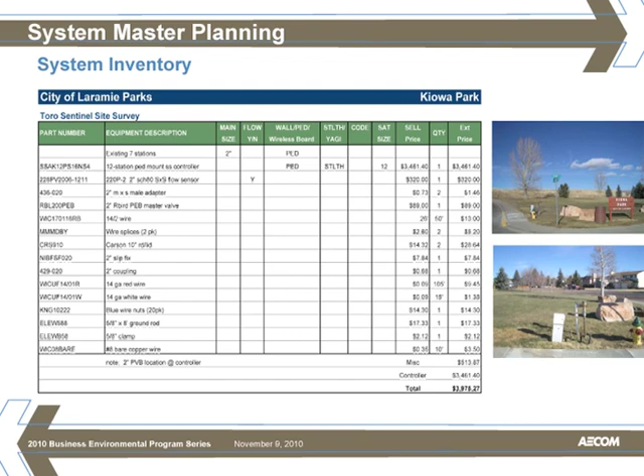So we look at what the needs of each park site are. The city of Laramie is implementing a system now, and we worked with them - we took a look at every park site, determined what equipment was going to be required, and so we could come up with a solid estimate for them on what the cost would be for their implementation. We did this for all of the park sites.

So a few things that I talked about before: who's going to manage the system? How many sites are going to be served? Do you need multiple control units? What are the water sources you're dealing with? What kind of pressures are there? Are you going to have pumps and so forth in the system? What are the communication methods that work within that area, and what's the availability of different communication methods? What kind of power do you have? Do you need to utilize - we have remote sites where we've utilized solar power.

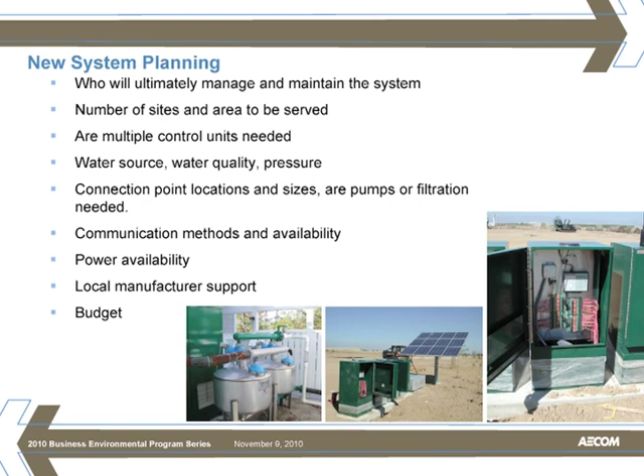And then, just system retrofit planning. So as you have a system that you've got to convert from one to another, how are you going to most effectively do that? If you have a business and you want to implement some of these technologies, and you have many sites to deal with, you want to look at what portions of the system might be reusable, what do you need to replace, and can it be done in phases?

We've come up with a process where we look at all these factors and come up with selection criteria to help large users of these central systems determine what systems they really need, what features they need, and then how they might most effectively be implemented.

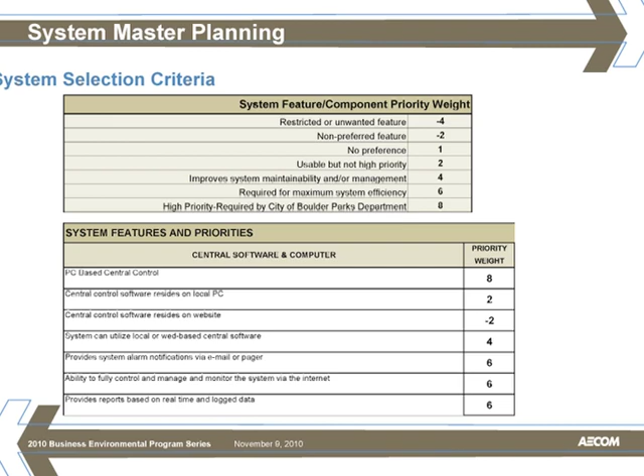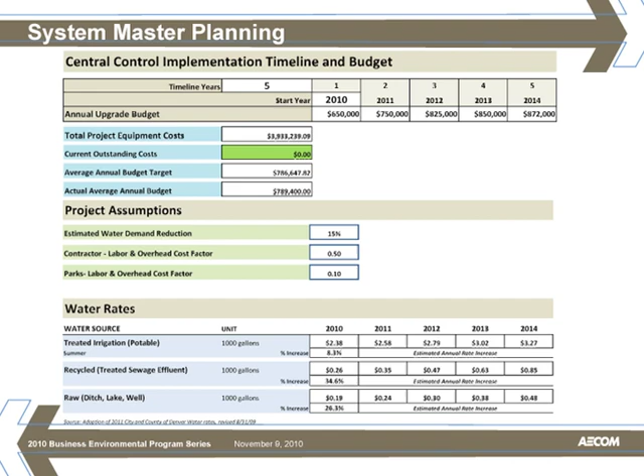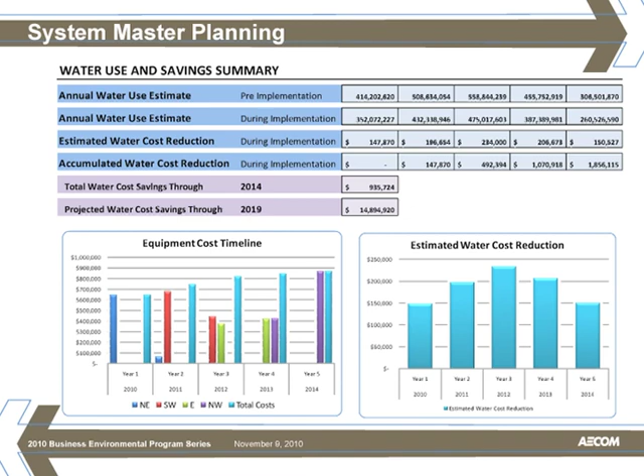So we can come up with a budget, looking over a given timeline at how much money they're going to need to spend each year to implement the system. What are the total equipment costs? How much can we reduce the irrigation demand? What are the water costs currently, and projected into the future for each year? That allows us to look at the potential implementation costs, as well as how much we can reduce irrigation over that timeline, and come up with a cost-benefit analysis.

So in this case, if you started in 2010 and went through 2014, as you start out you have this accumulated water cost savings every year. In this scenario, over that timeline, there's a potential of saving about $935,000 on water usage versus the cost of implementation.

In year one, it's costing us money to put the system in. Year two, it's still costing us money. As we start getting more sites online and managing them better, we start to see in years four and five that we're actually having a positive cash flow, because we're saving water even though we're still spending money to implement the system. So it's a valuable tool for the user to see what the benefit is going to be.

The big thing to look at is that's just five years. Now take this savings and extend it over 20 years, and it becomes really substantial. So even though the cost to implement some of these systems seems huge, the potential savings, when you start looking at the escalating water rates and so forth, is substantial.

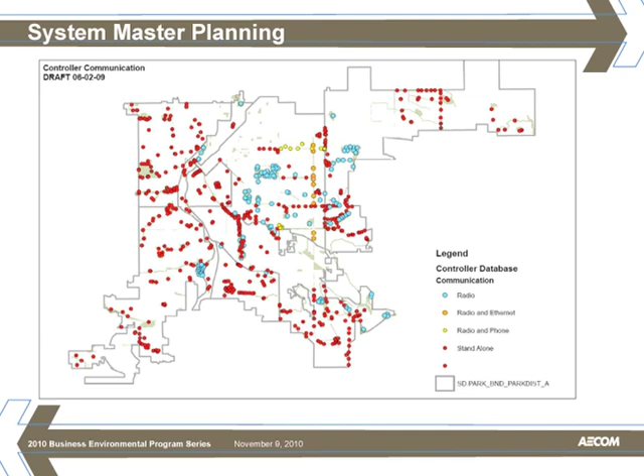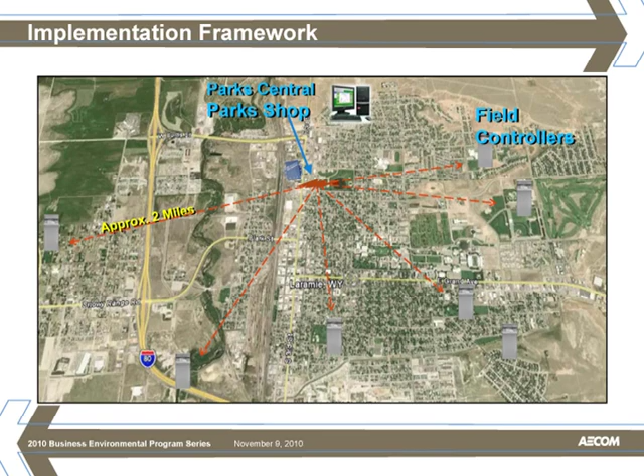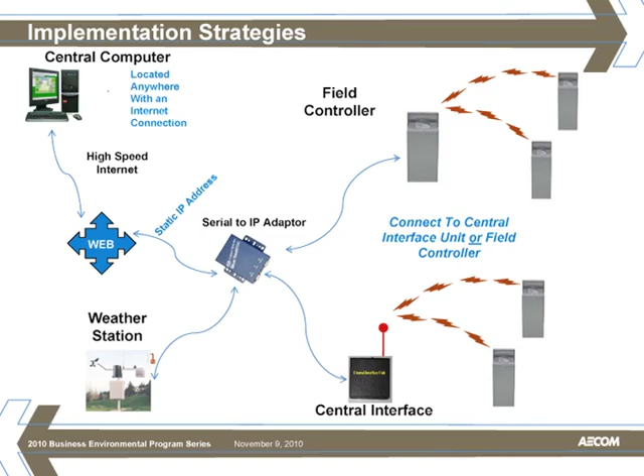Just looking at planning these systems out, we go and look at what kind of communications, how well can we communicate from a central point out to all the controllers, and what kind of systems we use to communicate. This is geared a little more toward maybe not so much this group, so I hope I'm not boring you, but it shows some of the capabilities and technologies available, and it really is pretty high tech nowadays as far as what can be done in the management of water and irrigation systems.

So I'm just going to go really quickly through a few projects and what the scenario was, and it might give some ideas for things you could do with your own sites or businesses.

This site was ultimately managed by the Homeowners Association. So they wanted this fancy control system, but they really didn't have anybody to manage it. We had to work with them to help them understand what was going to be required for them to manage the system that they had.

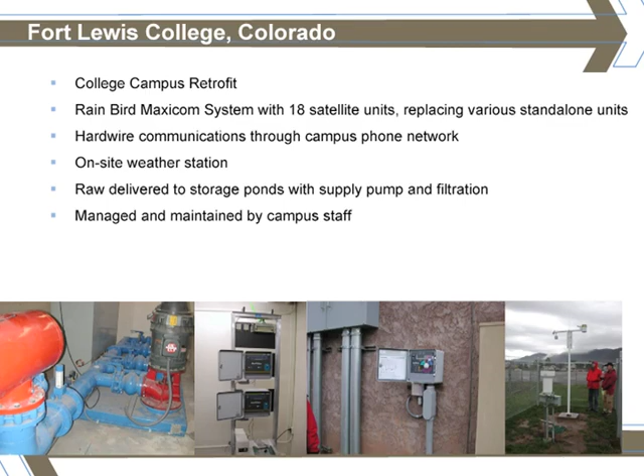They implemented a new pump system, but also a central control system. Once they got proper pressure and proper management of the system, they were able to get their irrigation done in 8 hours during the night, at almost a 60% savings. It was really substantial because they were just overwatering everywhere.

With the implementation of a central system, and an on-site weather station, they were immediately able to really crank that water use down, but also reduce the time they had to water, since before they had to water all day. Of course, they had students walking around getting squirted, and areas that were muddy with people walking through them, all kinds of problems. So it's a really great example.

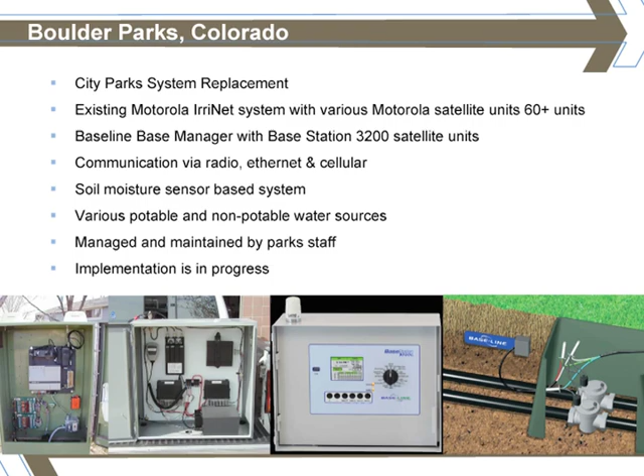Denver Parks had a similar thing. They had some central control type controllers, and they wanted to figure out what kind of system to use to manage all of their parks, and what's most cost effective. So they're working on getting more of their parks online. With over almost 800 existing units, the water savings potential is really tremendous.

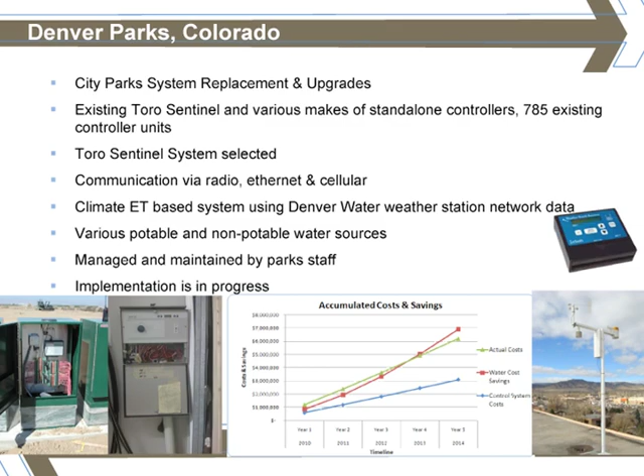The city of Laramie is working on installing a system now, and looking at how they're managing things. They're doing pretty good with what they have, but they're going to be able to do much better, and save a lot of water and a lot of man hours in their management process.

We're also working with the city of West Jordan, Utah, and they're doing a similar thing. They have an old system that isn't really working for them, and there's a lot of great technology now that they want to look at to figure out how to best implement a new system.

So just in closing, if there's any questions or comments - I found a couple of quotes that I thought were good. I really like the one about don't throw away the old bucket until you know the new one holds water. Those are things we can all learn from.